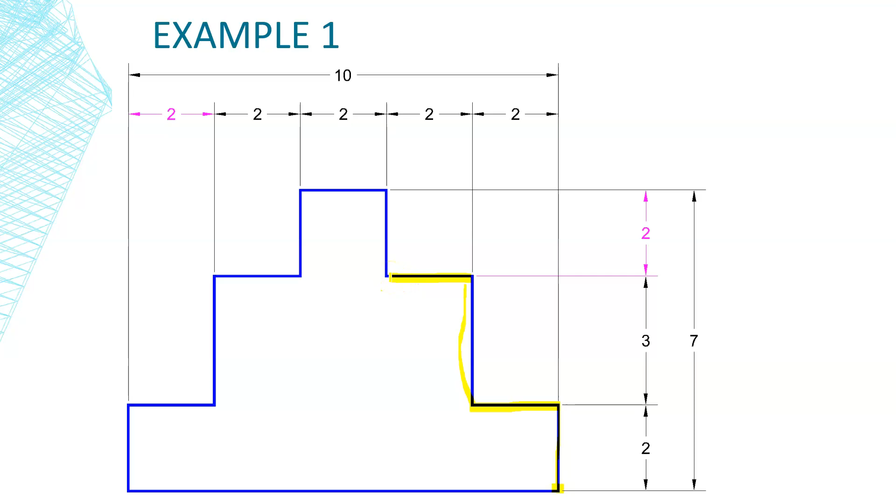You may also notice that I have a few dimensions in here that are magenta colored, and I'm strictly talking about these two dimensions here. Normally, what you will see on a drawing is that these two dimensions will be omitted. Basically, you should have enough information to figure out how far this line is based on the information you have. You see that the overall dimension is 7, and going up vertically this dimension is 2, and this dimension is 3. So 7 minus the 2 and the 3 gives me 2. Therefore you don't need this dimension, but I put it here just for learning, so we can discuss it.

The same thing can be said along here at the top. We see the overall dimension is 10, and we see all of these dimensions equaling—each one of these equals 8. So if I have 10 minus 8, the remainder left over should be 2.

Alright, so enough of me talking about this. Let's switch over to AutoCAD and get started.

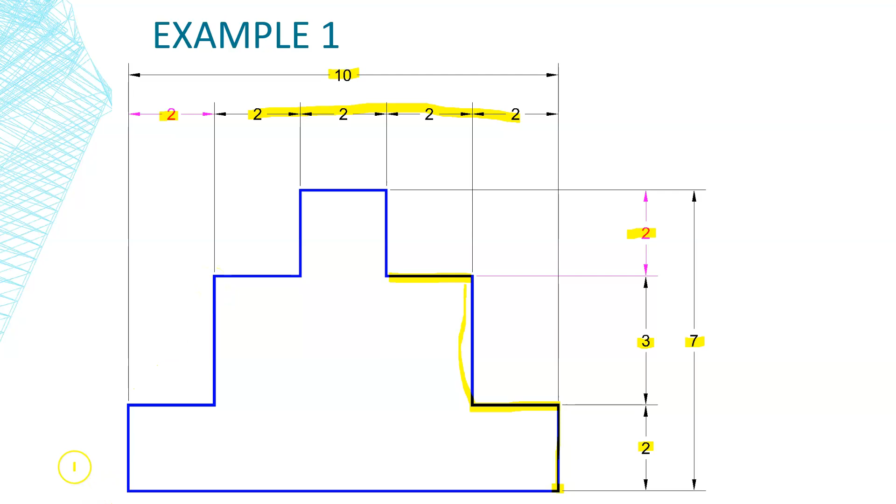So like I was saying in the introduction, I noticed that all of those lines are going straight, horizontally and vertically, which lets me know what I want to start with. I'm going to go ahead and activate my ortho mode so I can keep all of my lines going straight. Now remember, with this we have to give it the prediction of where it's going to go. I'm going to go ahead and turn off the grid since it's not needed in this example, and now I'll start the line command.

I'll click my first point. Remember that anytime we start the line command, it can be absolute, so I can type in what coordinates I want to start at, or I can just pick some random point. In this case, I will just pick here.

Now that my ortho is on, I have to give the predictor of where it's going to go. I'm going to start at that corner, go up, type in 2, enter. Now I'm going to go left, and you can over exaggerate this prediction, so I can extend it way out to this direction, and I'll type in 2, enter.

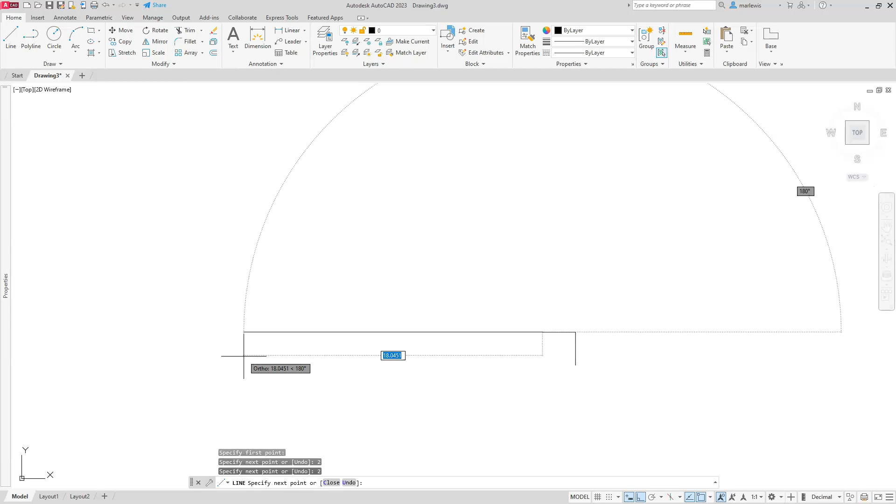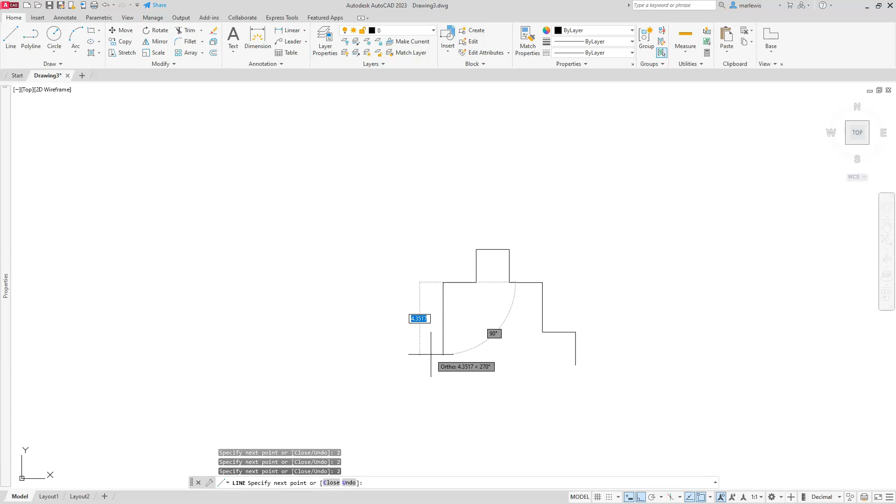Once again, I like to over exaggerate mine a little bit. This is 3, enter. Come back this direction, 2, enter. Let's go up, 2, enter. Back to the left here, 2, enter. Let's come down, 2, enter. Let's go to the left, 2, enter. Back down - you can always over exaggerate these just to make sure you're going the right direction. But this distance is 3, enter. Come to the left, 2, enter. Come down, 2, enter. And then the last one, since I did not break my command at all, I'm just going to type in C, enter.

So this is really simple to do. I just wanted you to notice that all of these lines were either vertical or horizontal, and that's the important thing you're going to see anytime you're using ortho mode. Now I'm going to step over here and do something a little bit differently on this one - take a look and do it in the polar tracking method.

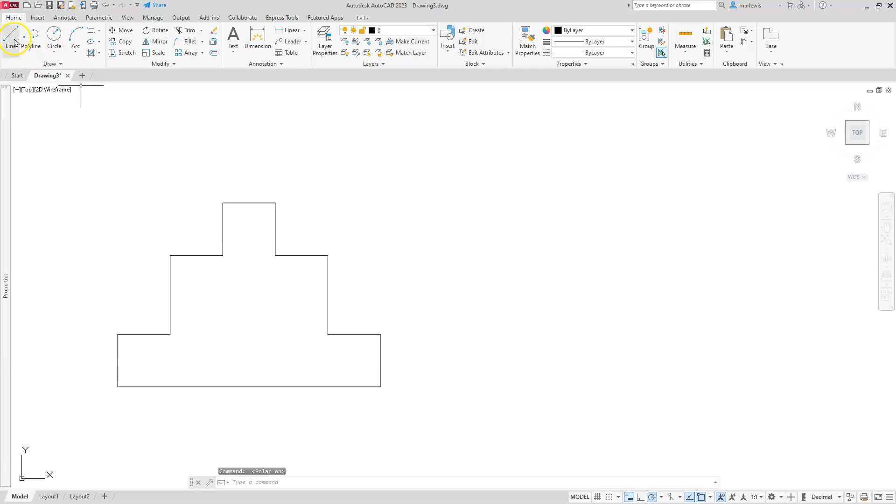Exact same process, but you're going to see that I have to have that predictor of that line. So let's go to the line command, click our start point, and now I have to get the green tracking point in the direction I want. That's 2, enter. Coming to the left, I get the green prediction, and make sure that it stays on that. If your line is not having that green predicting line there, you'll see that if I type in 2, enter, it's going to go at that angle. So make sure that you're getting that green tracking line.

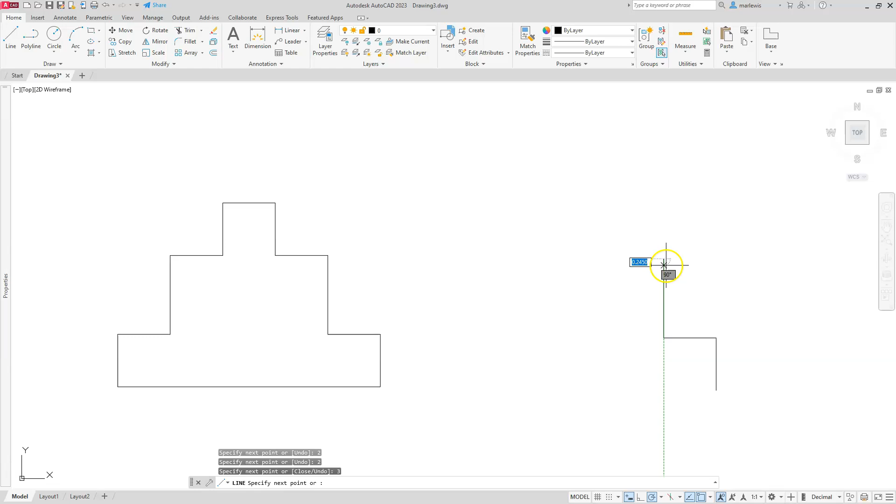2, enter. Let's go up. 3, enter. 2, enter. 2, enter. And I can't stress it enough how important it is to make sure that green tracking line is coming. 2, enter. Come down. 2, enter. 2, enter.

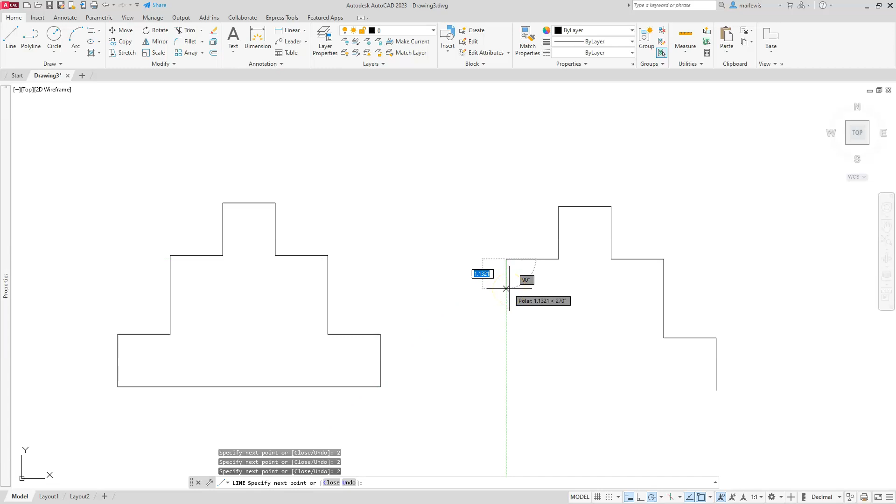And you can always change in between. So for example, if I just said, hey, this is getting too much to try to figure out where my predictor line is, I can always switch to ortho mode and go 3, enter. 2, enter. 2, enter, and then see the close.

So you don't have to stick with one method, and that's the most important thing I want you to understand. There's multiple ways of doing most of these problems - whichever way works best for you, that's going to be the one you're going to find out. I hope you understand the difference between ortho mode and polar tracking. Both are super useful, and especially when we come to doing some angles and other things in some more videos, you're going to see it does make a difference on how you set things up.